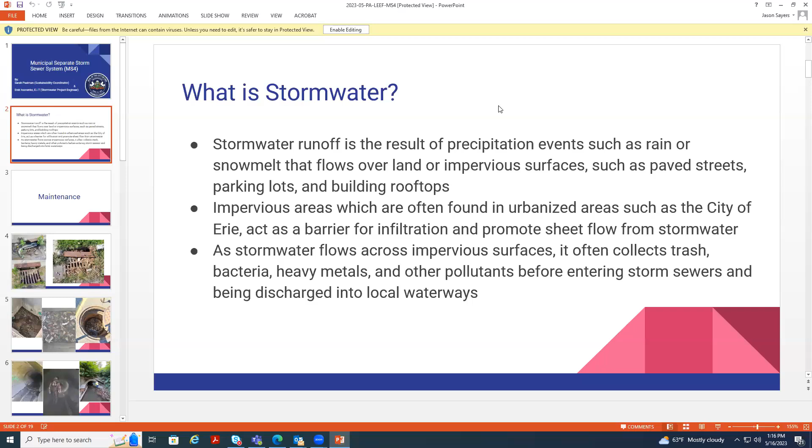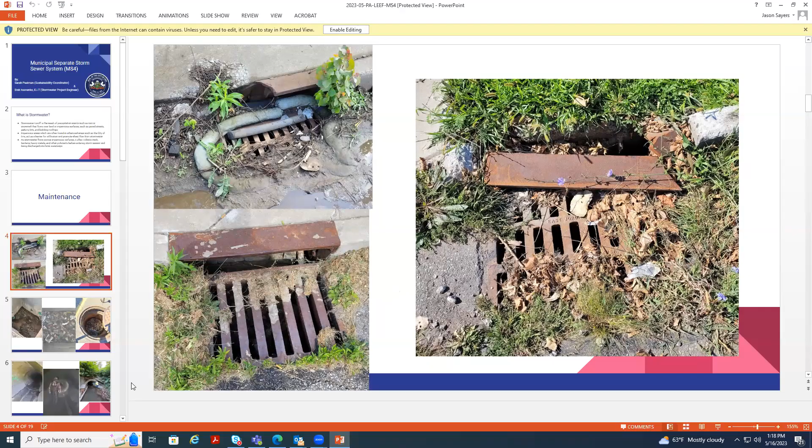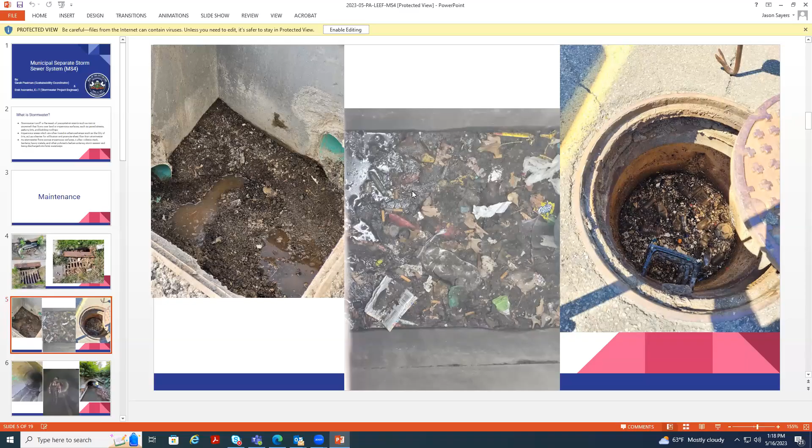With the manhole situation, that stuff got in there through an inlet, and then was washed downstream into a manhole. That's why inlets are your first line of protection against pollution, because that's actually where the material enters the storm sewer system.

The next slide, as far as maintenance goes, this was a project we did last summer. It's a 72-inch tile segment on Garrison Run, a storm sewer in the city of Erie, down near the Soldiers and Sailors Home. This was a project we worked with the DEP on. It actually qualified, I believe, for a waiver, but we still worked closely with the Northwest Regional Office. What we did was a shotcrete repair of about 750 feet of this pipe.

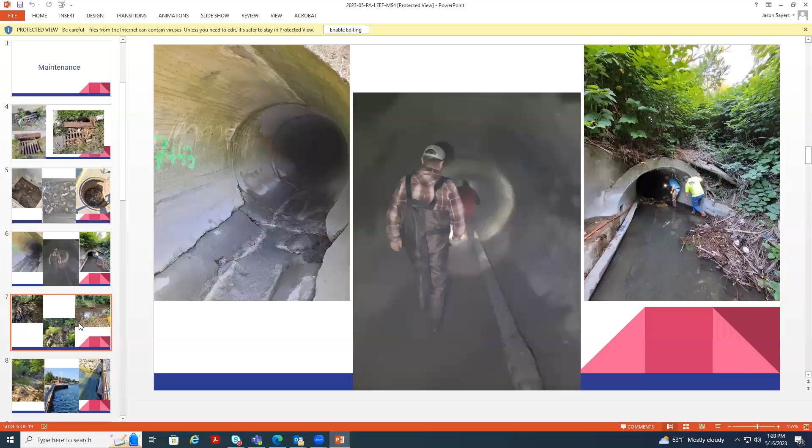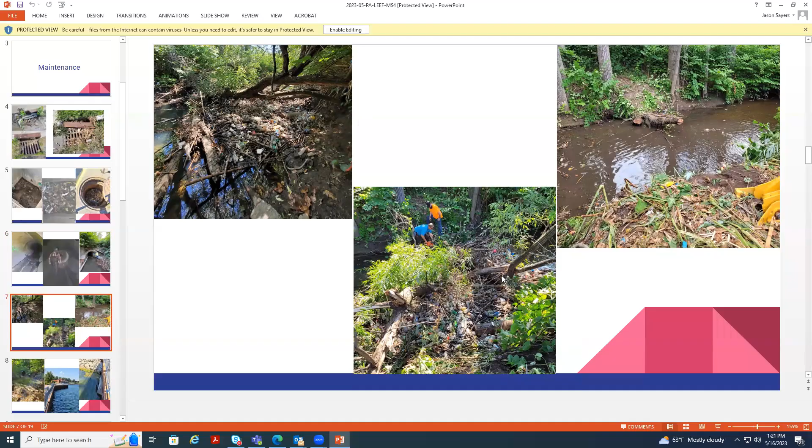Moving on to BMPs, enforcement and inspection.

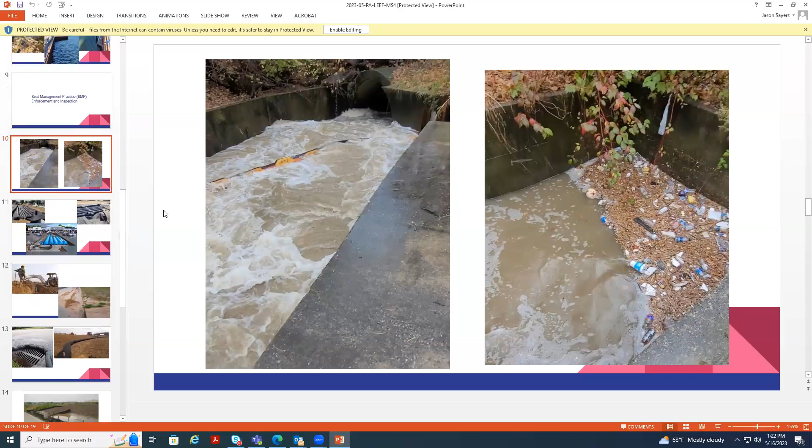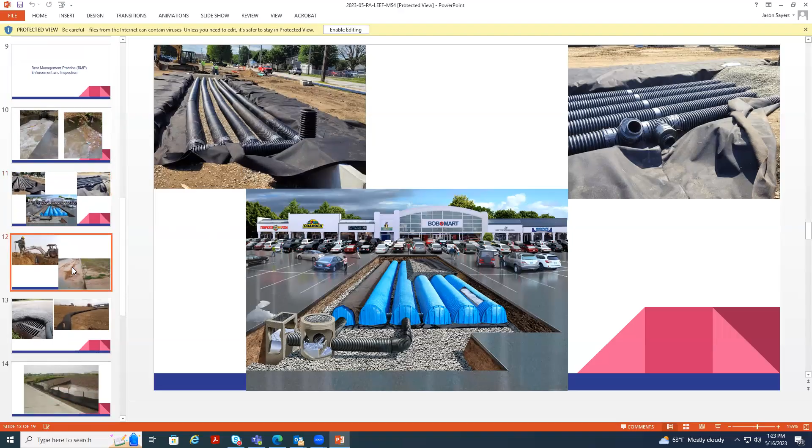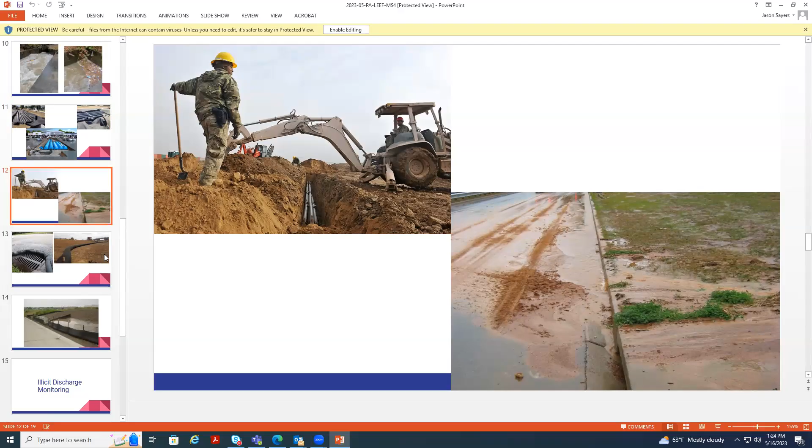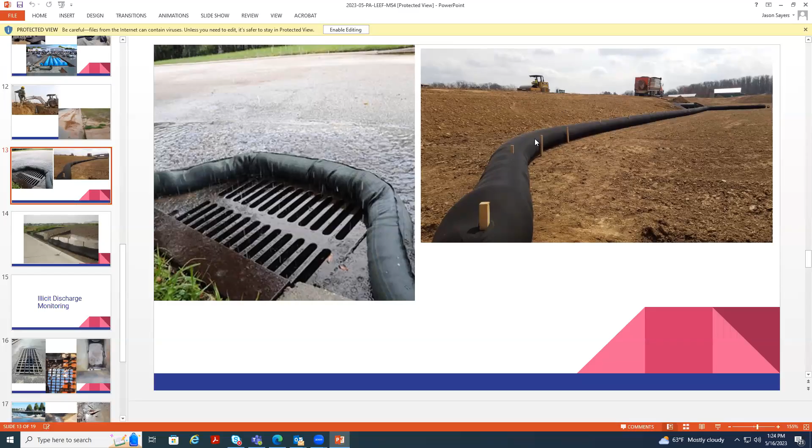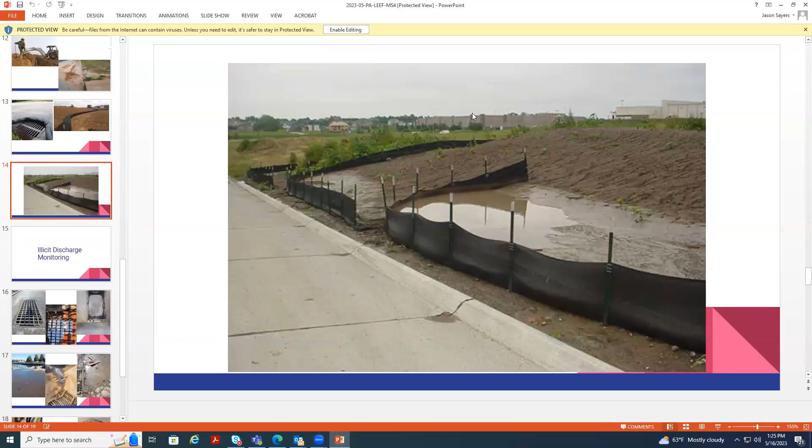Again, these are not taken in Erie. I think these are just examples.

ID, illicit discharge monitoring, we call this IDDE. It's one of our minimum control measure number 3 out of the city's NPDES permit.

So we just have a few slides here of illicit discharge that occurred in Erie not too long ago. This actually happened. I'm obviously not going to name the entity or business involved, but there was an illicit discharge that was brought to our attention.

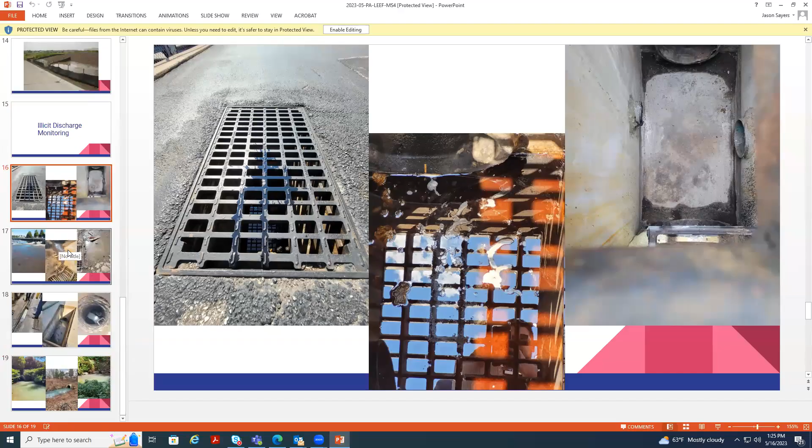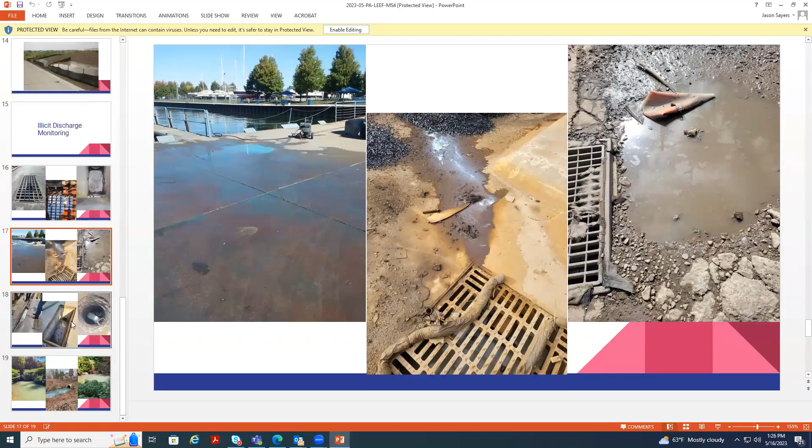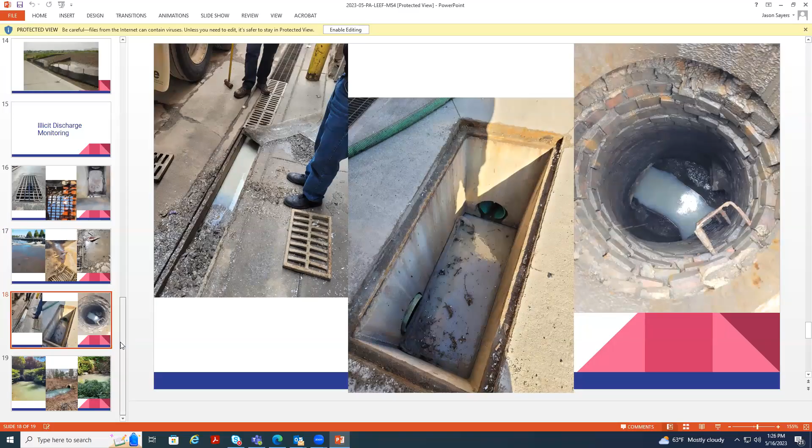And these were all things that our team did. We went out after it was reported and we back traced it to these different structures to identify the source of this. And then the bottom here, I guess this was where the initial sighting had occurred.

But then we worked with the health department and the DEP and the company, and this was all remediated and taken care of, and all the parties were on site full time until everything was cleaned up and done to a satisfactory condition.

So that pretty much concludes my presentation.

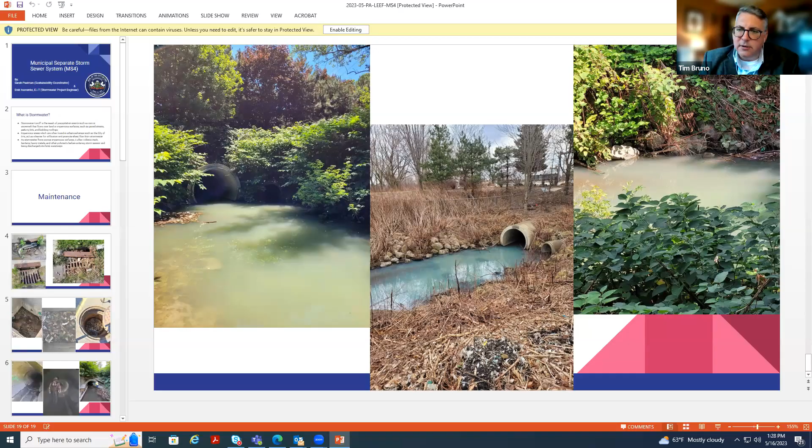And you have a couple of different concerns there. You have public health and safety. You have water quality, which, many of these waters make their way down to Presque Isle Bay, which is really a focus of our tourism and recreation and fishing industries over the multiple times of the year.

Faced with all of this infrastructure and the need to fund it in the future, you looked at fees to generate revenue. Can you talk a little bit about that program, what you found, the types of levels necessary to keep this infrastructure up, and then looking off into the future, kind of what your priorities are?

Oh, absolutely. Yeah, thanks for the question, Tim. So a couple of years ago, the city of Erie decided to really take a hard look at implementing a stormwater fee. This is a concept that's been around for some time. We've been aware of the city of Meadville, which did this, probably one of the first ones that we knew of in this area, and they had done this quite some time ago.

And so the city studied it for a while. And then a couple of years ago, we really started to get serious about it, because we recognized that with the infrastructure that we have, we needed a sustainable funding source for at a bare minimum for maintenance. But obviously, we want to be proactive as well, like that project I showed about the shotcrete and the gunite repair that we did.

So we brought a consultant on board to work with us to develop a stormwater fee, a program, and then all the things that go with that, such as a credit policy and appeal system and all the different components of that.

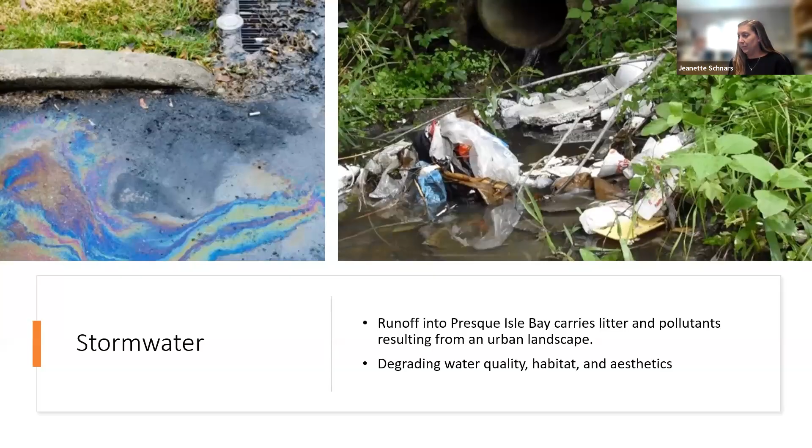So this is a pilot project, and it is really being led by Keep Pennsylvania Beautiful. And the person leading this is Don Benzakowski. He is retired from Pennsylvania DEP from the Coastal Zone Management Program, but he is now the Northwest Pennsylvania coordinator for Keep Pennsylvania Beautiful, and they have this project that they've been working on with some grant funds.

where they really wanted to install something like a litter boom, or there's a product out there called a water goat. They're looking at all these different things. And so the different partners, including myself, Eric and Teresa Guerin from Lakeshore Towing, representatives from Gannon University, and Dawn, we're all looking at this. We really wanted to customize it and make it work specifically for the sites where we wanted to install these BMPs.

So using some of the expertise of our partners, we're really customizing and building this similar to a litter boom that you might see used for construction projects on the lakefront, whether they're installing a dock or different pilings. So this floating boom, but then also incorporating some absorbent pads to also get to some of the pollution. The goal is really to capture, but not only capture, but also to categorize the litter and other pollutants being discharged from two outflow pipes into Presque Isle Bay.

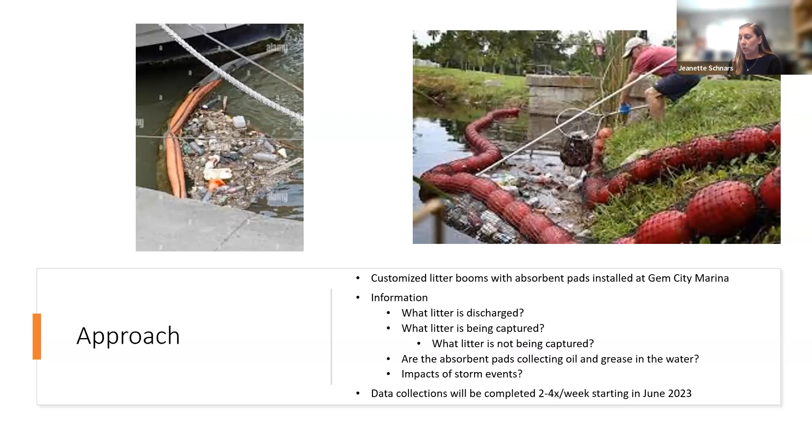We hope to, on that second one, get some information on the litter that goes underneath the boom as well. It's not really a very deep site, so we can't have the boom go all the way down—there has to be some space underneath that—but we're hoping that we can try to also examine what is getting past the boom as well.

So I'm going to switch gears and talk about our harmful algal bloom project that we work on, and give some updates on what we're planning for this summer. One thing I want to point out is that harmful algal bloom events happen locally. If you've heard of HABs before, it's probably been in the western basin of Lake Erie, by the Maumee River near Toledo. There's a lot of HAB events throughout the summer there, and they really have quite an issue with that.

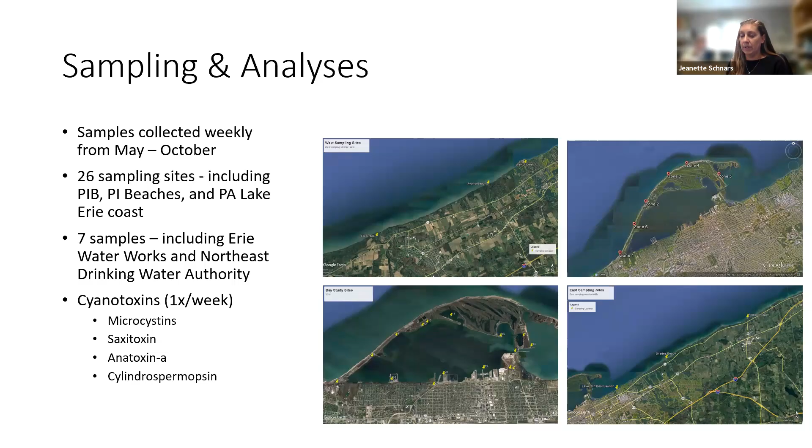And then the results, like I said, we will get them out as soon as possible, but the microcystin and saxitoxin results will come out typically Thursday when sampling is completed, so late Thursday. We will post it on our website, which is also, that map is found on our website and the Erie County Department of Health website.

In addition to HABs, it is also showing E. coli, or the bacteria that dictates if beaches have advisories or restrictions, or if it's safe to go in them. So we will continue to have both of those pieces of information on the website there on that map. Like I said, it's on the RSC website as well as the Erie County Department of Health. In addition to that, when we get the results, we push them out to our partners.

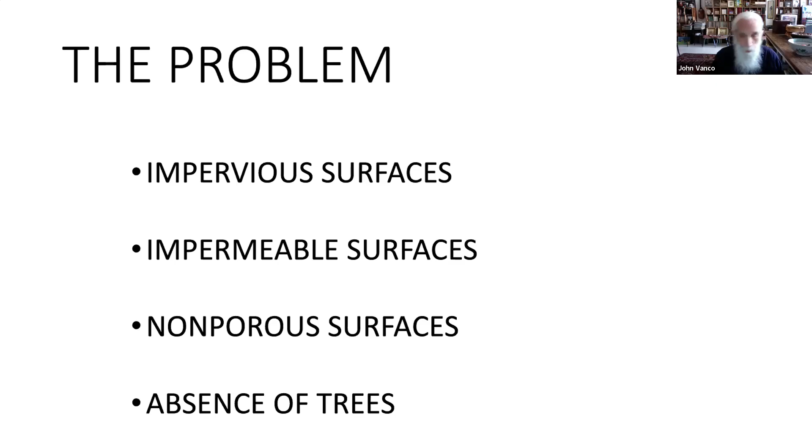If you look around our community, you'll see a sidewalk and a road, concrete and asphalt and more asphalt, and vacant lots covered with grass. Generally speaking, trees are something in the distance or in some other neighborhood.

But a lawn is not a pervious surface by any kind of gold standard. Yes, there is some water absorbed by lawns, but you might be surprised to know that according to research at Penn State, a forest can process 7 times as much stormwater as a lawn. Your lawn, because of the grassroots structure and soil compaction, can only absorb about 2 inches of water per hour, compared to a forest that can handle 14 inches or more in the same time frame. So a lawn is not a totally impervious surface, but it's not what we need.

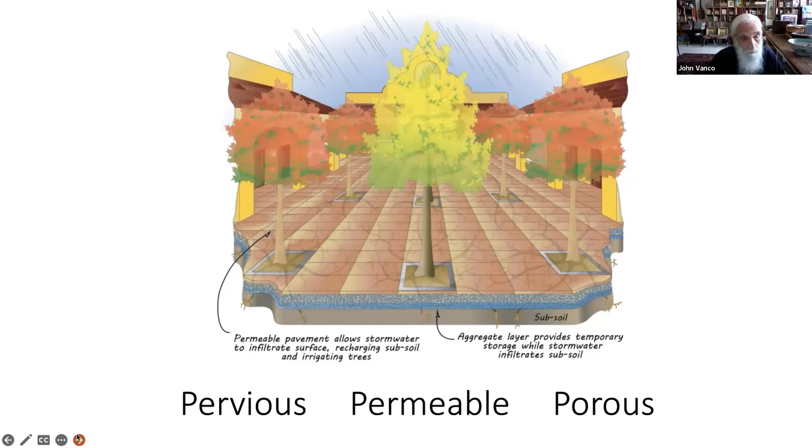A pervious paving system, properly installed, sits on top of a bed of large aggregate which has spaces that accommodate water. In an ideal situation like the one pictured here, they also have trees that both handle water as it falls, and after it's fallen, pull the water out of the subsoil and transpire it into the atmosphere.

This is a publication from the EPA, Stormwater to Street Trees, and it deals with engineered solutions to stormwater that support trees. Trees are really vitally important, and I recommend this. It's available online, and I've used a lot of the illustrations from it as part of this talk.

Trees reduce stormwater in a variety of ways. When rain falls on a tree, the leaves get wet, the twigs get wet, the branches get wet, the trunk gets wet. Think about it - when it starts to rain, what do you do? You step under a tree. It can take quite a while for the water from the rainstorm, unless it's raining like crazy, to come through the tree and finally drip onto the ground beneath it.

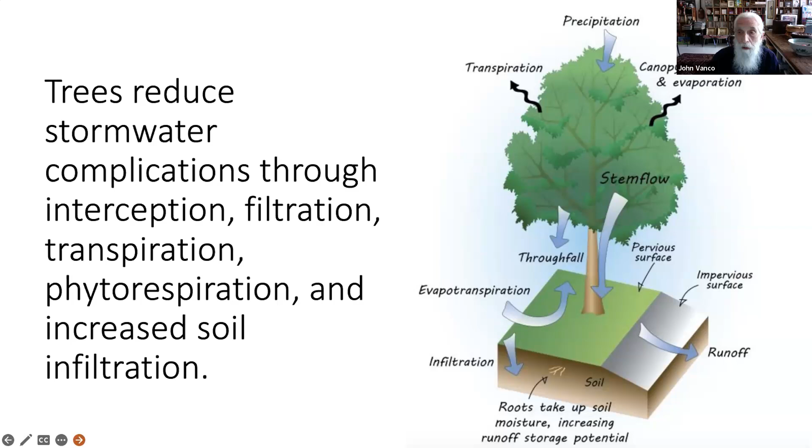If the tree's in a forest, this is all enhanced by the buildup of leaf litter, which creates a tilth on the soil beneath it that also absorbs water and increases the amount of water that infiltrates into the soil. And when it's not raining, the tree is taking water out of the soil, up into its leaves, and transpiring it - putting it out into the atmosphere. Hopefully the tree is supported in a way that allows it to have enough water.

In really dry places, stormwater is looked at as an asset, and we should look at stormwater as a potential asset as well, because with properly designed infrastructure, it can support trees in places where we can't grow trees right now.

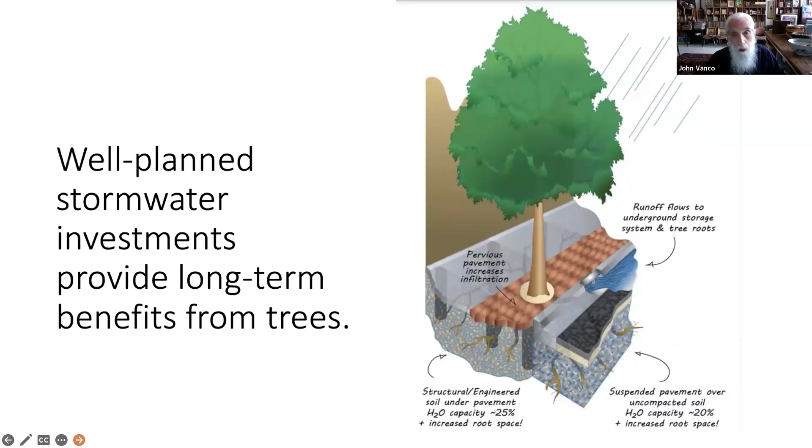Trees need soils that are not compacted, so that they can spread their roots and absorb the water we're talking about. Structural soils are mostly large aggregate, a large gravel of some kind, and they yield about a 25% void. The spaces between the stones of the large aggregate are then filled with soil, and of course with rainwater as it comes down, and they support the tree.

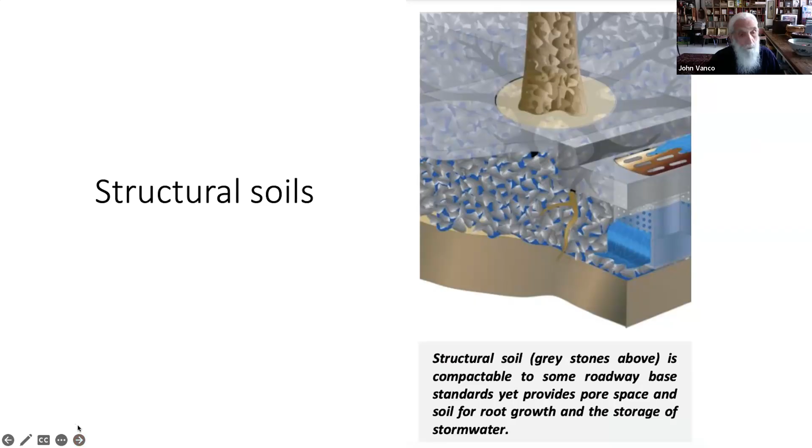Structural cells are a step up from that. Again, the pavement and the cells can be supported by these basically footers, these columnar footers that prevent the soil underneath them from being compacted, so that the tree roots have access to that.

This is a solution that's employed in large cities where there's a lot of buildings and where the normal traditional little tree planting area just isn't sufficient. Urban trees have a hard job, and they suffer a lot from their urban environment. They don't live nearly as long as trees in other situations. It takes things like this system, structural cells and structural soil, to support trees in those most intense situations.

And it makes a huge difference. If you go to Pittsburgh and Liberty Street, they installed a system like this a few years ago, and it's great. The trees are thriving, and it makes a huge difference to have those trees in that intensely urban environment.

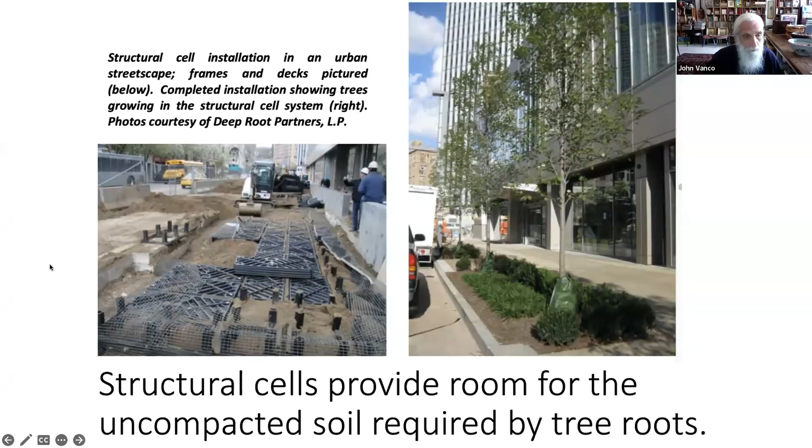So all these engineered solutions work together. In that other picture, there was an inlet I pointed out that goes into the tree well rather than into the storm sewer. We need more of those. We need those in parking lots. It is so rare to have a parking lot in this community, and in a lot of communities, that actually supports trees and is designed with trees in mind. And that's got to change. That's got to turn around.

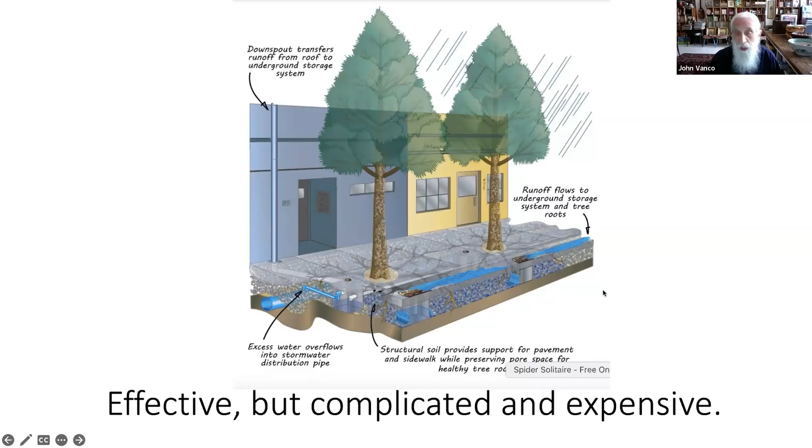These kind of solutions, of course, are expensive and complicated. They require maintenance, but there are others that are somewhat less expensive: swales or rain gardens. Swales are often mistaken for ditches. They look like a ditch, but unlike a ditch, which carries water away, swales are designed to hold and absorb stormwater. When a swale is combined with trees, they do a really good job of that. They absorb the water, they prevent overwhelming the storm sewer systems, and they provide all the benefits that trees provide to us.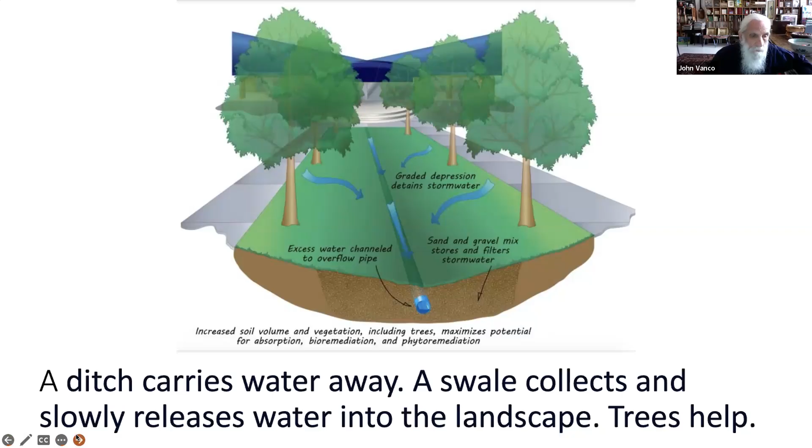There are other solutions, of course. Most importantly, the solution lies in municipal leaders changing their way of thinking. Trees are infrastructure. Trees dramatically impact the quality of our air and water. They address stormwater issues, they save energy, they sequester carbon, and they're just nice to have. They make people feel better. We have to stop looking at trees as an expense and recognize that they are investments with a very substantial return on investment. We need to incorporate the economic value of trees in all our planning and budgeting for municipalities.

Really important, we need to protect the trees that we already have, especially the large trees, and we need to favor large tree species. We need to be planting oaks and maples and tulip trees and hickories. We need to plant big trees because they have a big impact. It's great that we're planting, LEEF, we've been planting lots and lots of trees, thousands of trees, literally, but the impact they have takes years to evidence itself.

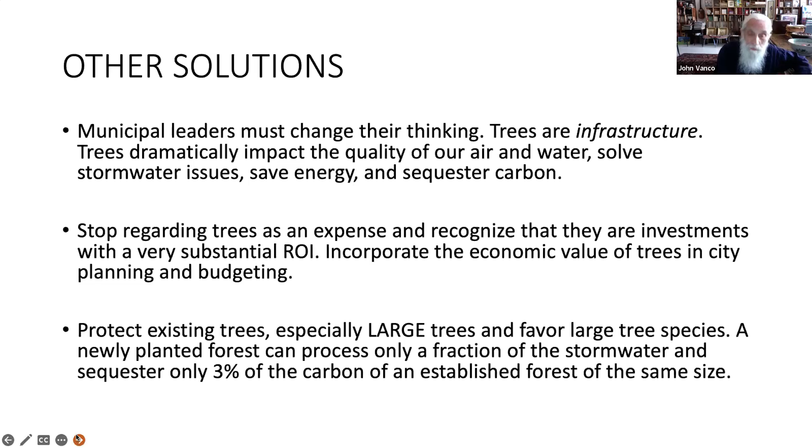Initially, seedlings have a very small impact on all these things, but it changes over time as they grow. But preserving a large tree has a much larger impact—it's equivalent, some say, to planting 30 trees. I've read 50 trees, and even larger numbers. So preserving large trees is really important. I can't emphasize that enough.

Stormwater benefits are real. They're calculable, and they are money. Here's an analysis of cities across the United States and the annual stormwater benefits they've calculated based on studying a limited number of trees. And those amounts can be quite substantial.

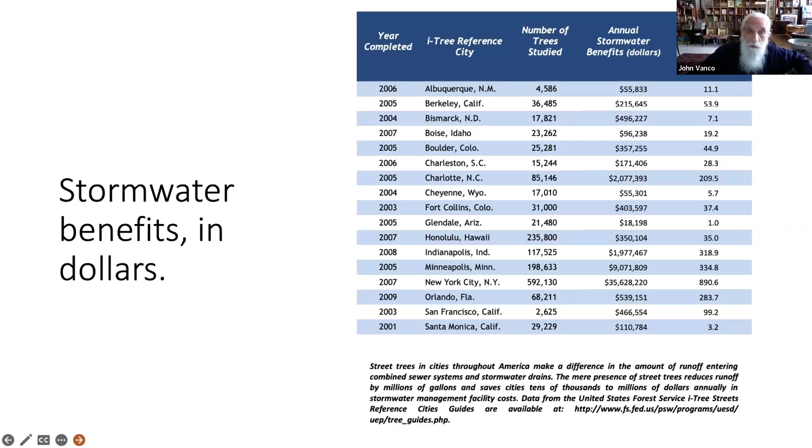In New York, they surveyed almost 600,000 trees, and they've come up with a benefit of some $35 million. This is an annual benefit. I lived in New York in most of 1967, and the one thing I remember about leaving was that I missed trees so much. Since then, New York has planted millions of trees and is reaping the benefits, as are other cities using trees to address the stormwater issue.

Amazingly, stormwater isn't the biggest benefit of trees, although it's huge—it's about a third of the benefit when you put dollar values on it. The biggest value of trees is intangible: it's property values, the enhancement of property values. And that's more than half of what street trees bring to the table when it comes to dollars and cents. Think about it.

The most expensive communities are full of trees. The streets are tree lined, the houses are shaded by trees. And where do you want to live? Someplace wide open with no trees around, or someplace that has trees in it? It's an easy answer for most people.

So I want to suggest another solution based on our experience, and that is not just to plant trees, but to plant tiny forests. I don't know—if we were assembled together here, I'd ask you to raise your hand and tell me how many of you know what tiny forests are.

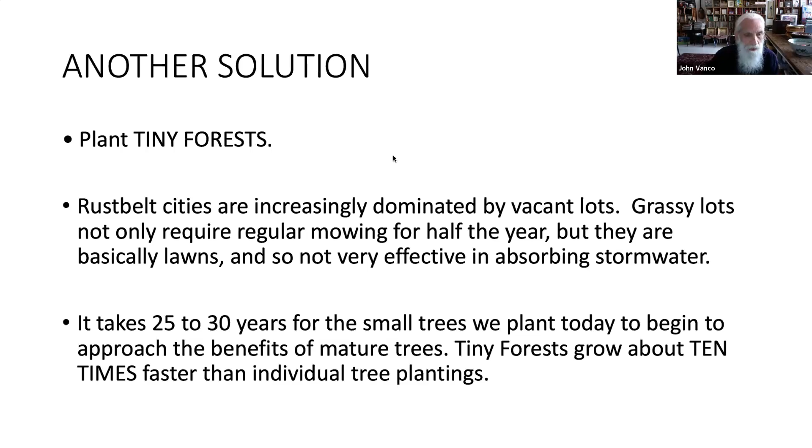One of the refuges was a weekly Zoom meeting with some friends, including a number of Europeans. A friend of mine who lives in Holland asked me, after I talked about trees, if I'd heard of tiny forests, and I hadn't. In fact, they weren't so well known at the time, but they were planning to plant 100 tiny forests in the Netherlands that year.

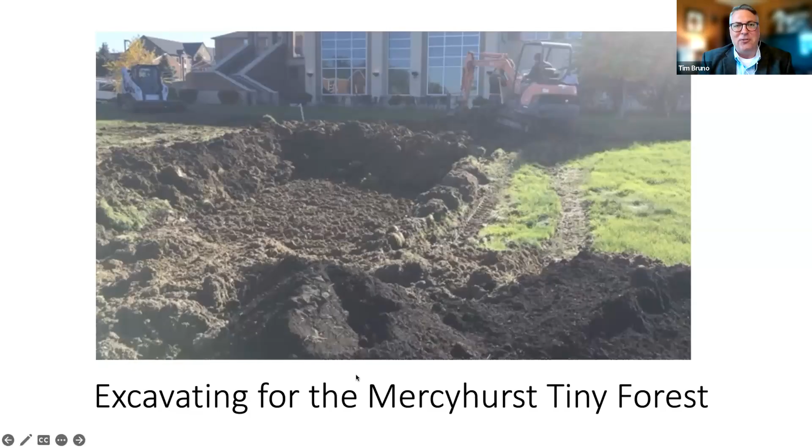John has helped arrange the Erie Blues and Jazz Fest here in Erie at Frontier Park, where one of our local urban watersheds flows through, Cascade Creek. Because of the riparian buffer and shading there, during that hot first week of August, when you have blues and jazz all around you, you can find roughly 25% of the kids in that whole place dipping their toes into the cool stream and enjoying that area. So thank you, John.

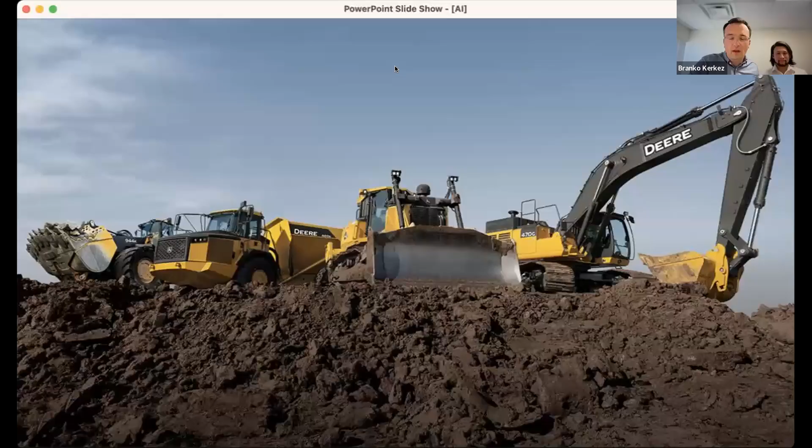Brandon, Hi. I'm Branko. This is gonna be a talk about AI, but we figured we'd start a little bit analog here and talk about machines. So in my second day job, I teach at the University of Michigan in engineering, particularly civil engineering. We discuss a lot of the tools that are being used to build the world.

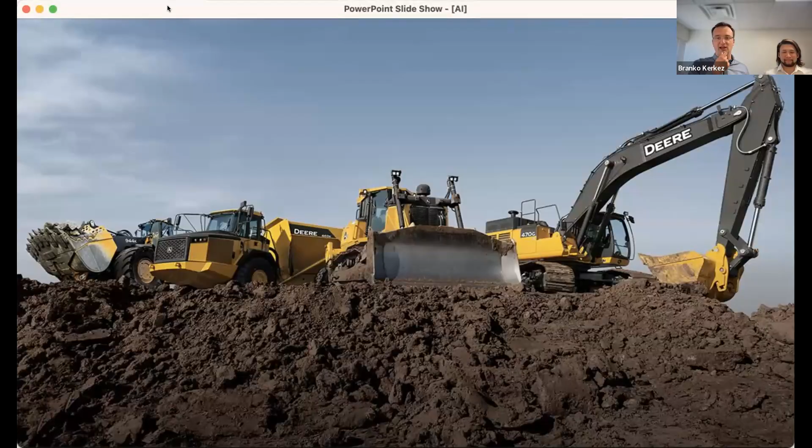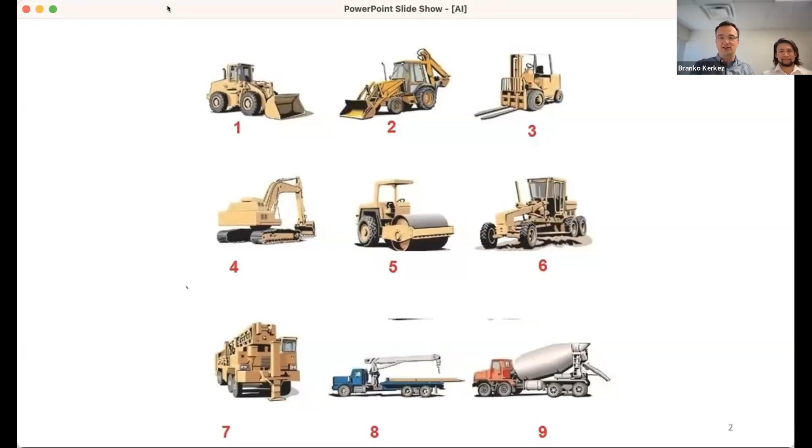These are just ones that are out there, but funnily enough, we have exams for seniors where they identify these, which sometimes I think some elementary school students can identify, but basically, what are the tools and what do they do?

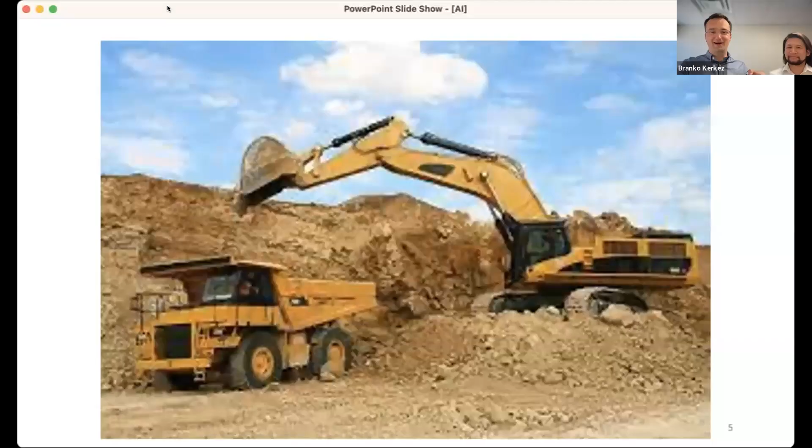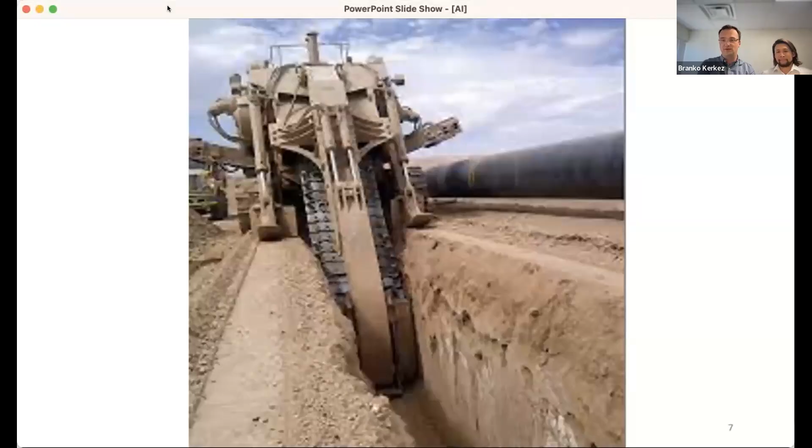So you get an example like this, and you identify what these things have to do. There's obviously infrastructure machines, some that scoop stuff into other ones that drive stuff away like soil, some that push soil around. There's very specialized machines, some that dig trenches. As we go into fancier infrastructure, you get really sophisticated machines, including ones like this.

That we were debating earlier. I'm pretty sure their purpose is to open the portal into the underworld, but we don't know. In any case, there's some really big machines out there.

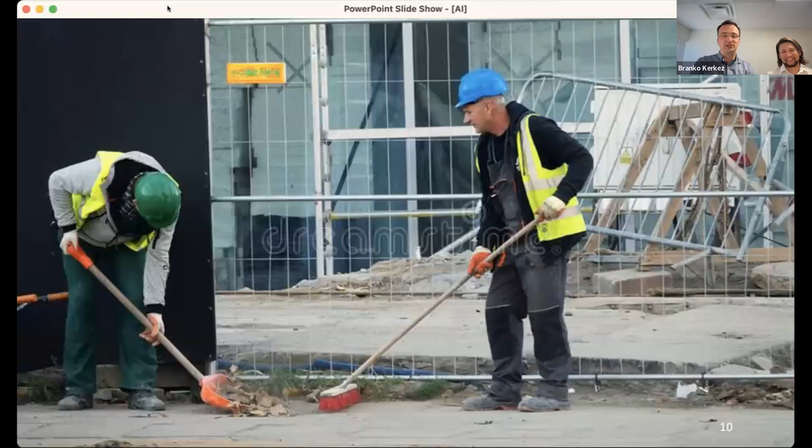But the funny thing to me is whenever I walk by a construction site, no matter how big it is, whether it's a big tunnel or a giant building, there's always people also with a broom and a shovel, right? Because there's a right tool for the job and there's a huge spectrum of things. I think we're familiar with this from an engineering perspective, whether we're building massive projects like the tunnel in Chicago, or building green infrastructure or planting things in our neighborhoods, as we just saw.

It involves moving the world around. And when we're given a pile of dirt or pile of soil, there is an appropriate machine to be used for the job. When we talk about the field of stormwater, these machines oftentimes are these big physical machines that we see around us, like this construction equipment.

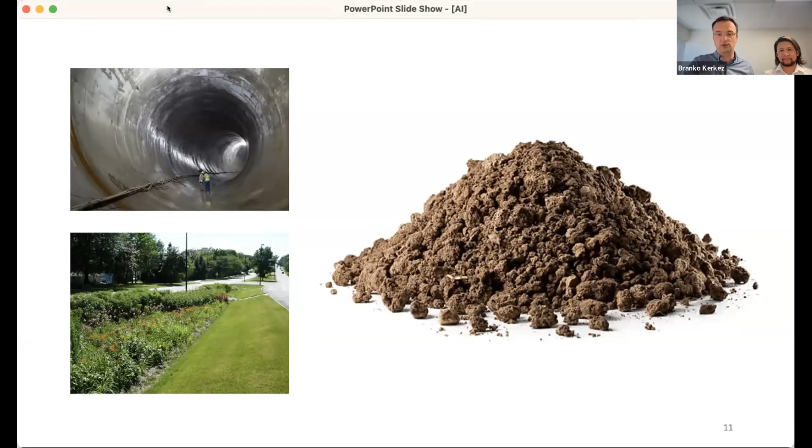What we wanted to talk about today in the context of AI is moving from the piles of soil that we have to move around to create stormwater systems, into what we want them to be. What happens when you get a pile of data? Particularly what we're going to talk about here is this underused or underutilized machine, if you want to think about it that way, that hasn't permeated yet into the field of stormwater as much as some other machines have. This machine over here is obviously the computer.

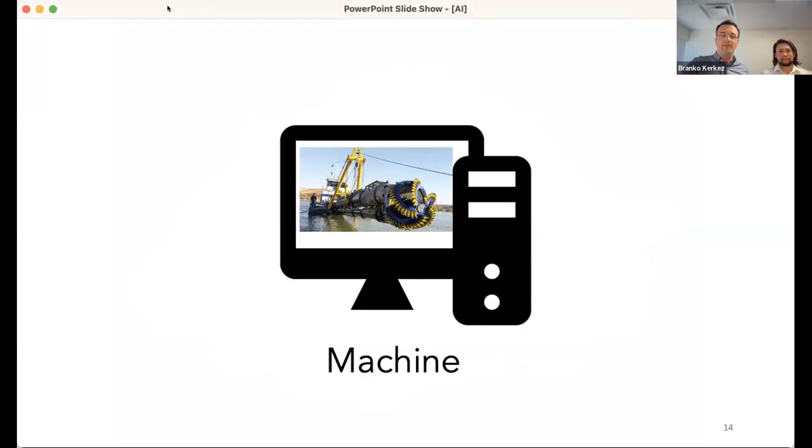I think a lot of us know that these days computers have the power of portal opening devices. There's just these massive things that can do so much, but we still kind of, at least in the field, and this is maybe sometimes what we see around, still use them like the broom and the shovel, right? They're these really powerful things, yet we still somehow are still not squeezing as much value out of them as we think we could.

So we've kind of wanted to contextualize this talk today, which we know is about artificial intelligence, about machines in particular. And the machine we'll be talking about today is a computer. So I'm just kind of tossing it out there.

I know we're in a Zoom call, but I'm sure all of you know that AI is changing the world—at least so I'm told by my TV. So basically, stuff is happening in the world, and I think today it's actually making the news a lot. Your smart speakers are listening to you, taking your orders, my kids are being raised by Alexa and Siri. The world is moving at a fast pace, yet somehow in specific fields—today we'll focus on stormwater—we're still untangling our relationship with technology, asking questions like, is it appropriate?

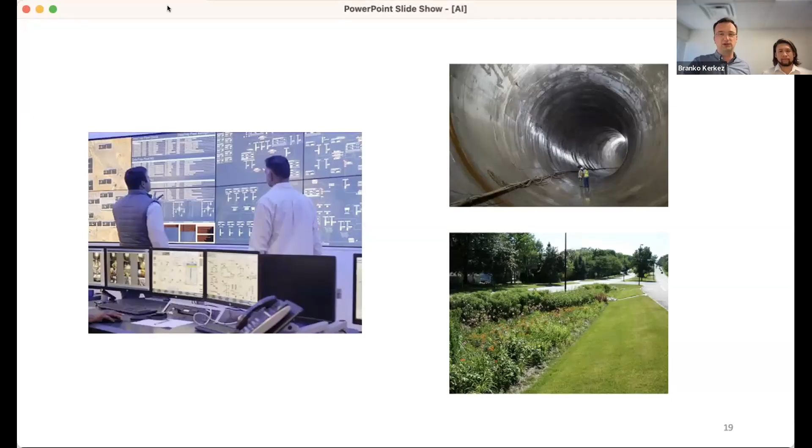What are we going to do with it? What do these fancy tools actually do, what could they possibly do for things like stormwater management, whether it's tunnels or green infrastructure or whatever? To get a little bit more context, you say, okay, I'm ready, I want to adopt all these things. And you hear terms like this—somebody might be telling you, hey, what you really need is a digital twin, which for a lot of you on the Zoom call, you might be wondering, what is that?

We're in the same boat. There's a lot of buzzwords floating around. A lot of times these tools like digital twins are really just buzzwords being used by high-level operatives, think CEOs and others, who are basically saying this stuff will change the world and you'll figure it out in your domain, right? But for now, digital twins and AI is all doing these things. The question really becomes, what does this stuff mean? Does it go beyond buzzwords and does it have some tangible impact?

What we wanted to convince you of today, this is at least our argument, is that in this era where we're living right now, where this stuff is all around us in the news, artificial intelligence is not artificial and it's not intelligent, really. This is going to be kind of our position as we move forward. I want to convince you today that artificial intelligence is really nothing more than math from like the 1950s, maybe a little bit after that, that's finally found a home in big enough computers that can crunch some numbers.

In the field of engineering, we've been crunching numbers for a really long time—it's just we're using different math to do this. So AI, again, is not artificial, it's not intelligent, it's just a bunch of math. And like any other engineering, we can figure out what to do with that math.

Just a little bit of history, this stuff started a while ago. It really did start in the 50s when people got together—I think this was at Dartmouth. They sat down together and said, hey, one day computers are going to be able to do lots of cool stuff, and that stuff is going to be part of a field called artificial intelligence. That's how they coined it, that's the name. We can go back and say, should we have called it something else? But that's what they called it.

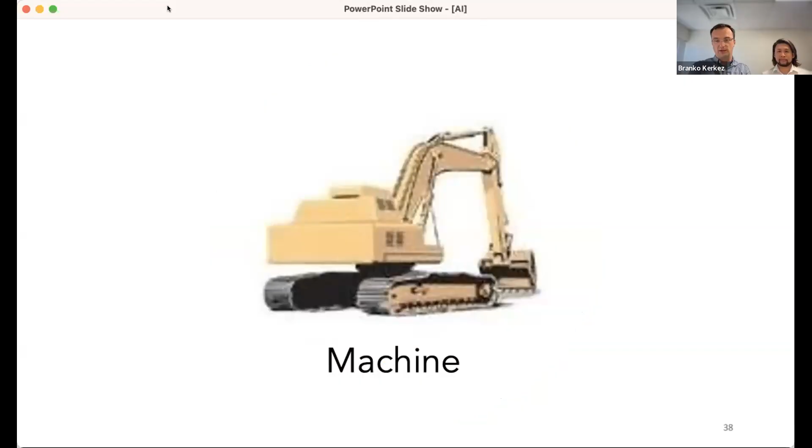This is where the machines come in that we were talking about earlier. These terms get used interchangeably, and because we haven't fully defined them yet, especially in the public sphere, we just talk about them very broadly. The field of machine learning is actually what we're talking about a lot of times when we talk about intelligence. It's not necessarily about intelligence, but using machines to get something done. And that machine is not the machines we're used to in our day-to-day life that push the physical world around and build us tunnels and green infrastructure. The machine we're talking about today is the computer.

The learning part that happens in the term is you feed a bunch of data to a computer, the machine, and that computer learns something. We'll talk about what that means in a second. And then it produces a model of the world, it tries to predict the future. So the whole emphasis behind this term is this idea that I put a bunch of data into a computer, it learns a bunch of stuff, the machine is learning, and then it outputs a prediction of the world.

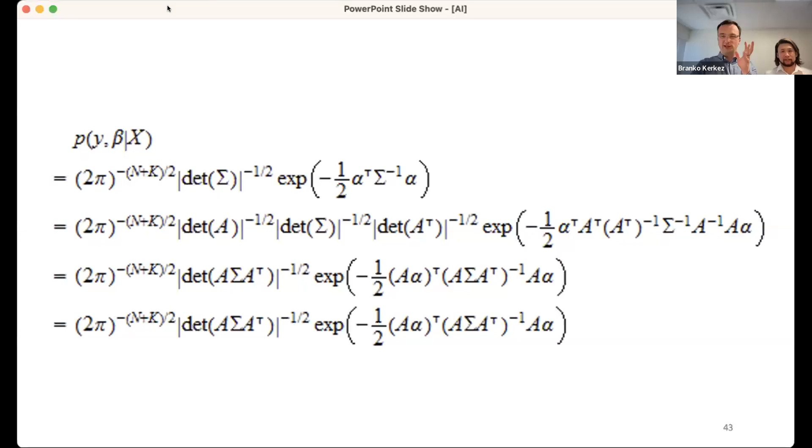If you've ever fit a line in Microsoft Excel, that's just the math that describes how you do that. Oftentimes when we talk about machine learning, people bludgeon you with this stuff to make it seem really complicated. But at the end of the day, a lot of us have actually been doing this already. You load a bunch of data into Excel, put a bunch of dots in there, and say I want to fit a line to this data, because once I have this line, I can predict whatever I want using it.

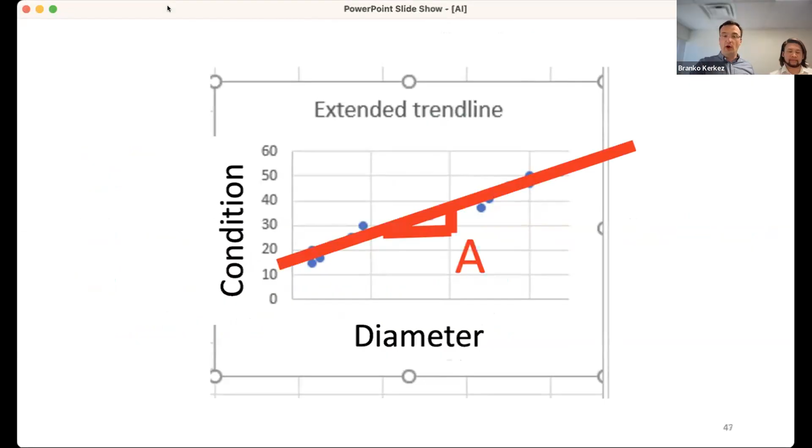The slope of that line is determined by a number, it's called the parameter. Basically what happens is you feed a bunch of data into your computer, that machine learns what that line is, which fits a line to that data, and it's just called machine learning. Once it learns it, it's able to make predictions. So it turns out that Microsoft Excel and fitting lines, or whatever your favorite program is to do that, is part of the field of machine learning, which is part of this bigger field of AI.

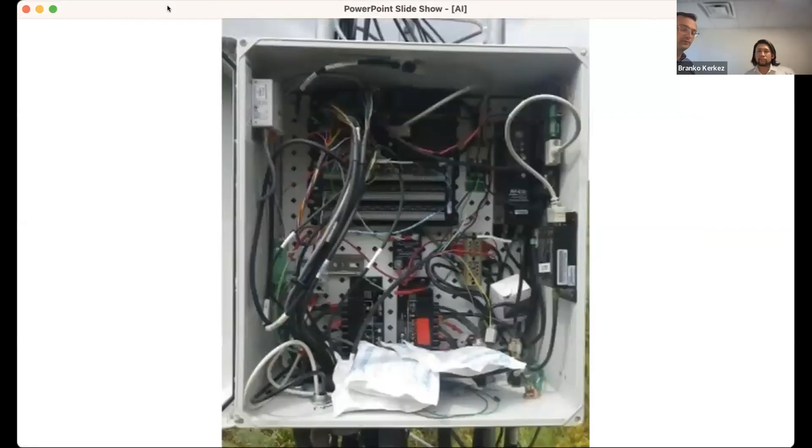Thanks, Branko. So these were some of the photos of the folks we spoke with, enabled through the Great Lakes Protection Fund, and some of these other conversations we had, really learning what was their ultimate problem to be solved.

Part of it stemmed from just having access to data and quality information. When we look at the options available, one was doing it on your own and being confronted with this rat's nest of wires. Another option was the USGS, which we've heard is quite expensive and can be prohibitive. Even bringing on staff to build that capacity in-house is a challenge in itself.

Before you can even process data, you need to collect data, and it turns out collecting it today is pretty expensive. So we set out to solve that first.

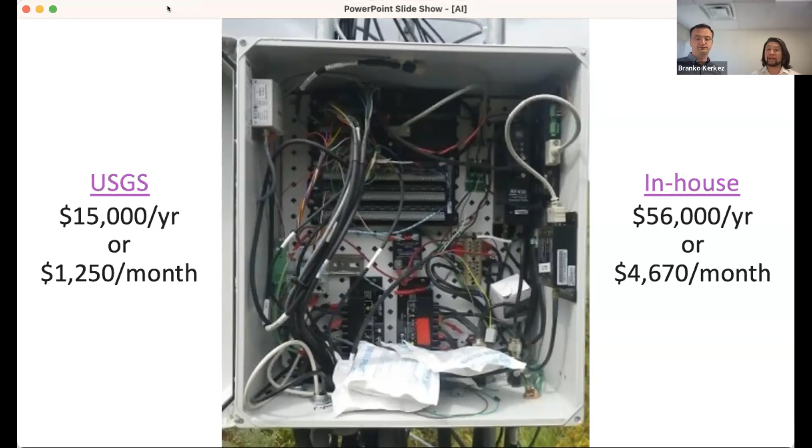The way we tackled that was by making monitors that were a lot easier to deploy and maintain. We talk about wires, but this unit is totally wireless now—no magic tricks, no wires. This is the unit, and it measures water level. It has a cell phone modem inside, just like your iPhone or any other cell phone. The unit pops into this bracket, and then it's just a matter of finishing the installation—installing these two screws, twisting that in—and the sensor is installed and online, sending out data.

So that's basically the idea of a simple water level sensor that can do your stream gauging for you, but doesn't require expertise out in the field. Anybody who can use a screwdriver should be able to deploy this sensor. We put a lot of effort into making that easy, to allow people to create those big piles of data.

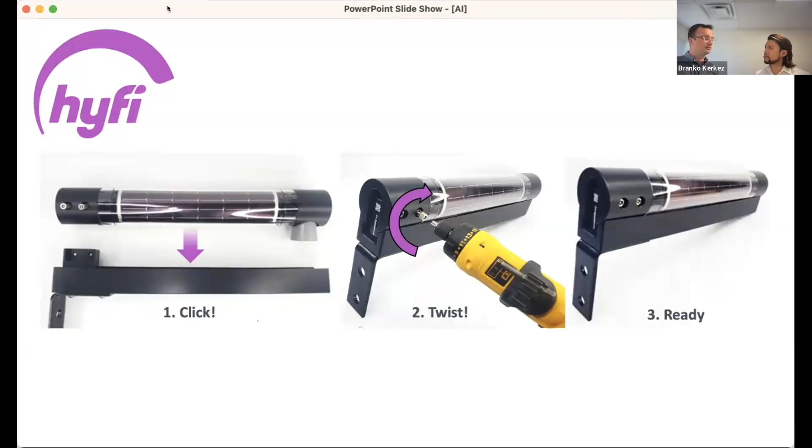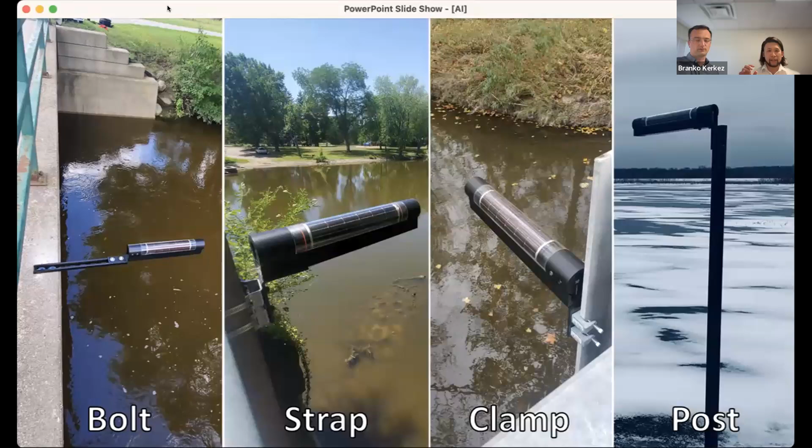The next thing is, even though the unit is there, trying to make it easy to install in a variety of applications that we've heard from in the field. So we're seeing now this unit can be paired with hardware from your local hardware store. If someone can run down to the street, get some nuts and bolts, they can attach it to a bridge, the side of a roadway, or even drive it into a post.

And it's been useful—we've seen from left to right, it going from spring, summer, fall, winter. Once it's installed, it's meant to be there for the long term, continuously amassing these data sets to start informing decisions on the ground.

So easy, an intern can do it. No diss on interns, but it gives them a lot of work over the summer. If you want to collect a bunch of data, it's a really, really easy thing to do now.

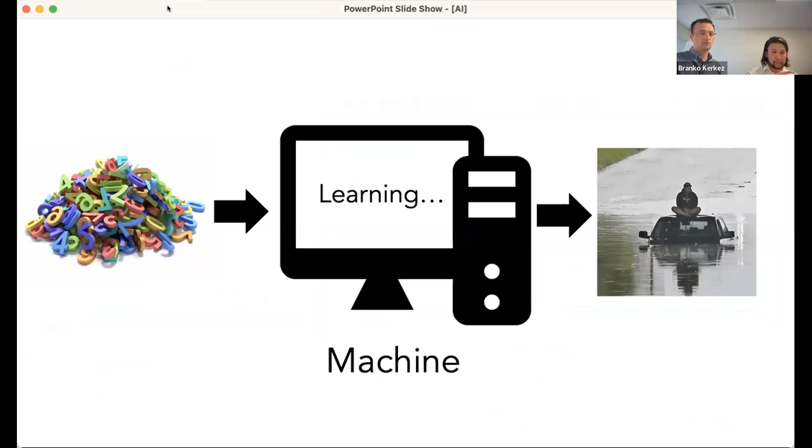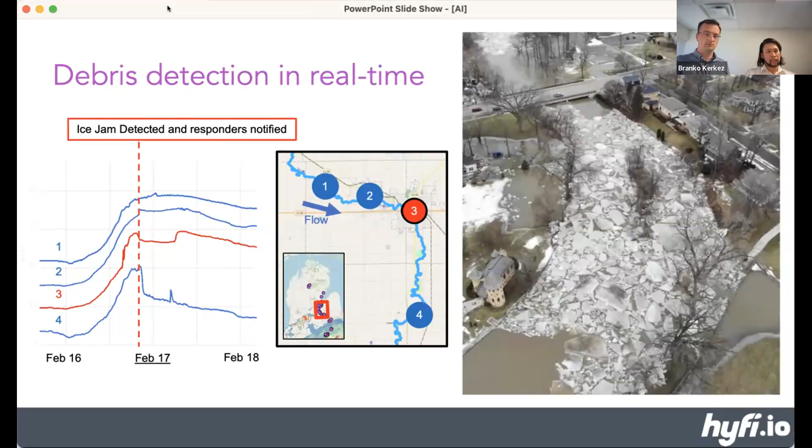So one of them here we're looking at is a network of monitors that was installed along a river in Michigan. It turns out that ice jam and debris detection is an issue for someone monitoring tens and even hundreds of miles of creeks and rivers. So what we're looking at is the rising and falling of water levels, or sometimes they don't fall, and the ability to look at that and see what is normal and what's not. This machine learning technique can help determine if it's different from normal, send out an alert, and then a first responder, someone from the fire department, can go out and inspect the issue and assess how severe an ice jam may be impacting a roadway.

Yeah, and I think we saw some examples from earlier talks where, think about stormwater infrastructure clogs, that happens all the time. Debris detection is something that can be completely automated by these technologies. So it's bringing to bear all the stuff that's sitting in our smart speakers and our self-driving cars and solving practical problems like, is there an ice jam? Do I have debris detection? Send me a message if there's something going on, otherwise don't bother me.

Because people don't need to be looking at data, they have a bunch of other stuff to do. So what we're doing is building these algorithms that can learn if something's happening that shouldn't be happening, and then send out notifications to crews if needed. And sometimes those crews are on the ground.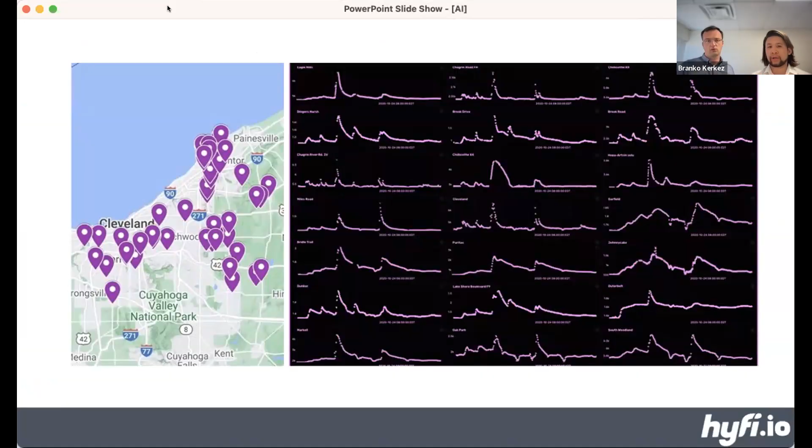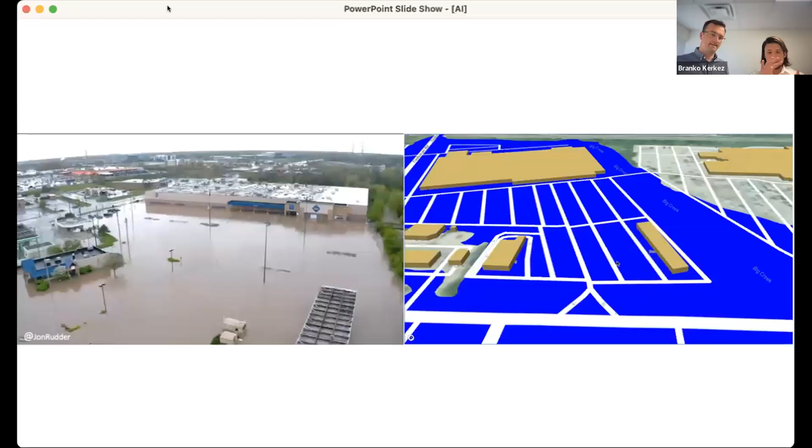So now where that comes in is the ability to tease out all these events, feed that into a learning algorithm, and then begin to develop a model of flooding across the entire region or even a specific site. That evolves into something like this, where someone can take a look at one of these images and start to assess if a roadway is going to be at risk, maybe the entire parking lot, or beyond that, an entire commercial complex. So that's where we start to see these yellow lines, red lines, purple lines, and start to convey what those flood levels actually mean, and how we can target those moving forward.

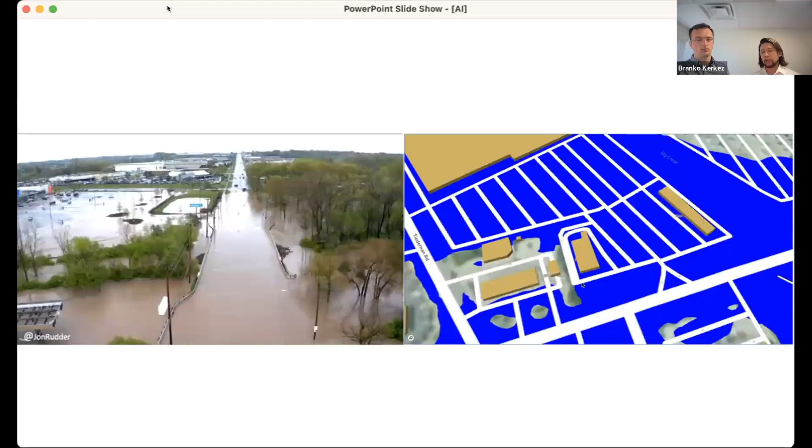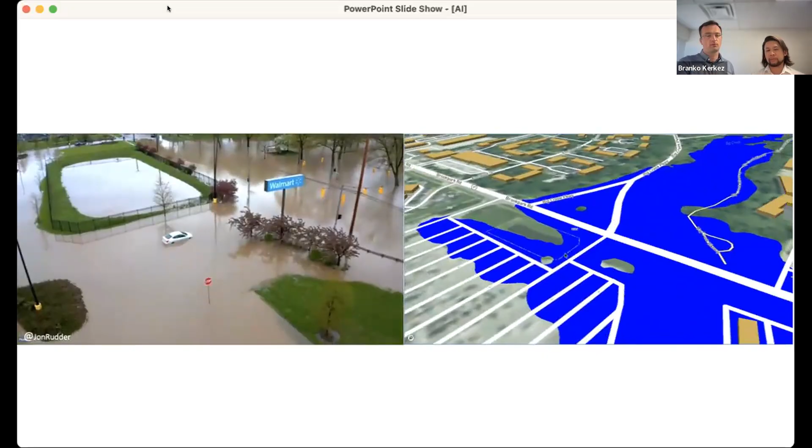So this is just another way of starting to explore and visualize what the impacts on the ground may be through data, and turning those into visualization tools and communication tools to help inform decisions on the ground.

So yeah, lastly, I think that's the idea here: taking the data from these monitors and converting those piles of numbers into something actionable, something that shows up in the palm of your hand, to create a more informative and quicker decision.

Yeah, and Dave introduced it earlier. We've been looking at these challenges for almost a decade now, and we created problems along the way to solving some problems. It turns out that if you make it really easy for people to collect data, like these easy to use stream gauges, you have to do something with that data. You can't just plug it into Microsoft Excel and expect something to pop out. There's just too much data, and there's ways to analyze it.

So I just wanted to close on this. I know we're running out of time, but just to close, that's the stuff that's going on now. There's a lot more stuff that's possible. This just shows an image of, we've not just been working on math. I mean, I like math, we like math, but we spend a lot of time out in the field trying to really understand what a lot of these things are. And I think David was alluding to this thing that we wrote quite some time ago.

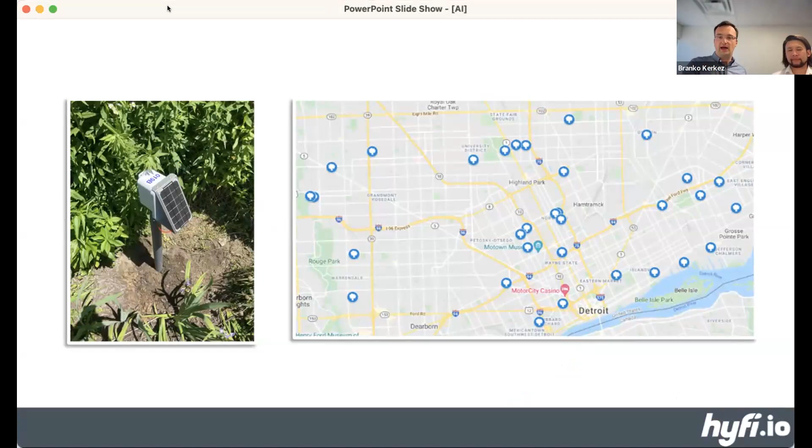So what we're looking at are future applications where you could do massive scale asset monitoring. There's an image over here of Detroit where there's a bunch of sensors deployed measuring green infrastructure. And then you can take that data and see how are my assets performing, are they performing like they should be? You can create maps that sort of tell you where should I place green infrastructure.

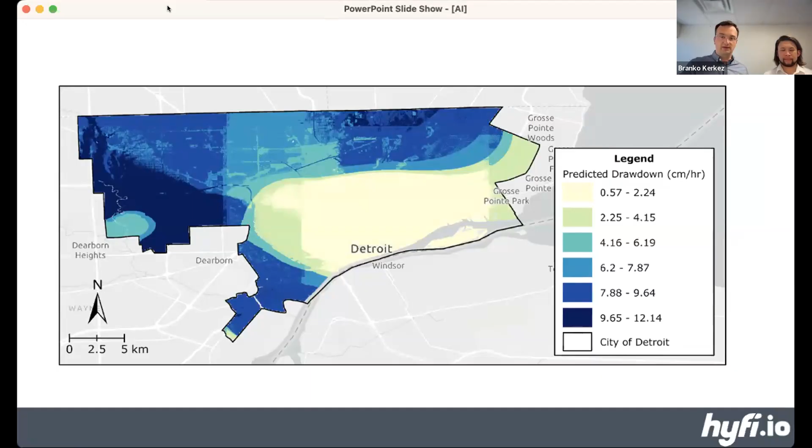Because that's something that doesn't get talked about a lot, is not just placing it and hoping it works, but where are the best parts of the city where this is going to give me the best bang for my buck. So when we think about strategic investments and making sure you're going to get the best ROI on your investment, having the data to scientifically and rigorously back up what it's going to look like will give you more assurance, for example, where to make your installations.

For those of you on call who are doing water quality monitoring, we talked about it, we heard about it earlier. A lot of times when we monitor water quality, it's so tied in with storms. And so knowing when to go out and take a water quality sample of nutrients or E. coli or whatever you're interested in, it's a little tricky. And so what we've been looking at are automated ways.

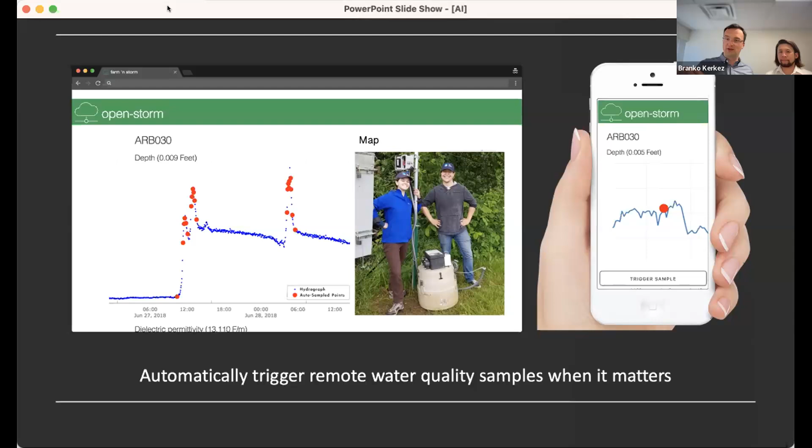So in the era of robotics, where robots are driving themselves, could we create smart water quality sampling devices that only take measurements when it's appropriate or when it's regulatory required or whatever those things are? This is an example of an automated water quality sampling protocol that just basically triggers a little mini robot, or automated sampler, call it whatever you want, to make those samples.

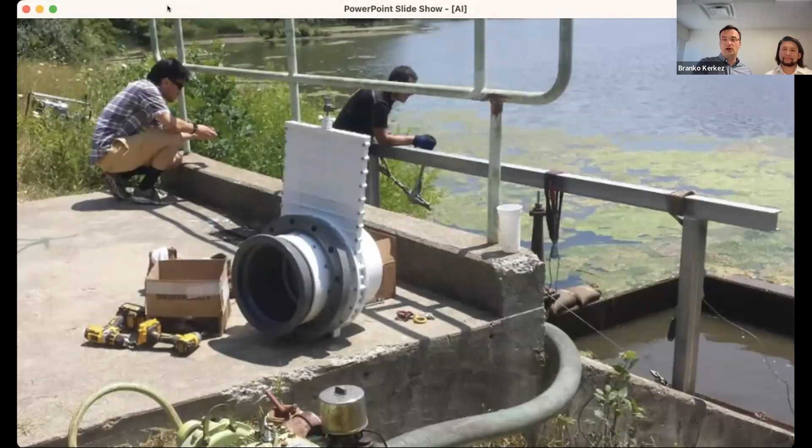And so just closing off here, there's many other things to look forward to. I think David was alluding to it earlier. Just like cars drive themselves, stormwater systems of the future may one day drive themselves too. I don't know if we're there yet, but if we equip our systems with valves and pumps that actuate themselves in response to changing conditions, we can squeeze a lot more performance out of those systems.

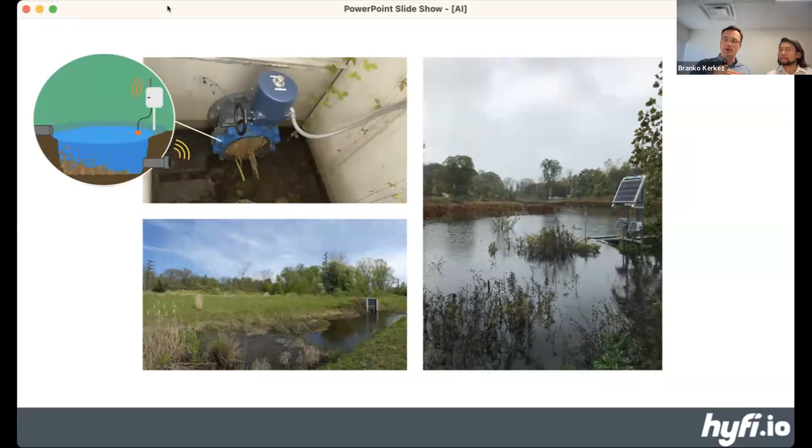Even a simple thing like adding an internet-connected valve to a stormwater basin, and closing that valve when the storm is over, will capture all that sediment and those nutrients. Then, checking the weather forecast and releasing that water ensures extra storage is available when the next storm hits, completely changing how we use infrastructure and creating real-time adaptation. We talk about adaptation at the millisecond or second level—humans can do that, but we can also automate a lot of this.

So we wanted to close by saying a lot of the technology is exciting—we obviously like technology—but these days it's often used as a hammer looking for nails, maybe a sledgehammer if you think about it more deeply. There's nothing artificial about a lot of these things; what guides these technologies is domain knowledge. Whatever your application area is, that's more important than the technology itself, because the technologies have matured and are ready to use. The broader questions are what problems we want to solve with them and what impact they can make.

So we'll leave this up here, and we'd be happy to take some questions if anybody wants to chat.

Thanks. Thank you, gentlemen, that's excellent stuff. And the possibilities going off into the future for this active management of any type of watershed is exciting.

Specifically for urban watersheds, this is exciting, especially for me as an environmental protection professional. For the last seven decades, we've been introducing stormwater management into our watersheds with very little thought of how it all works together, and a lot of times it can combine and make problems even worse.